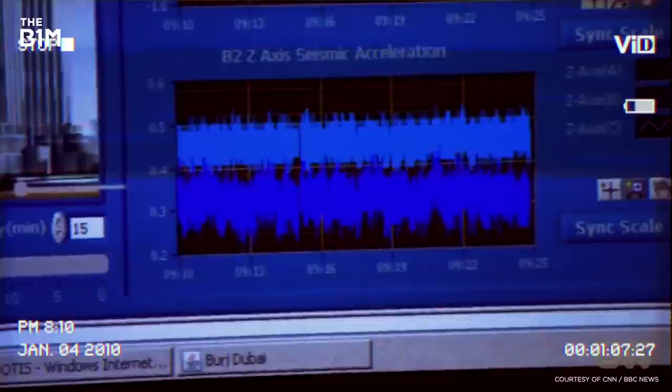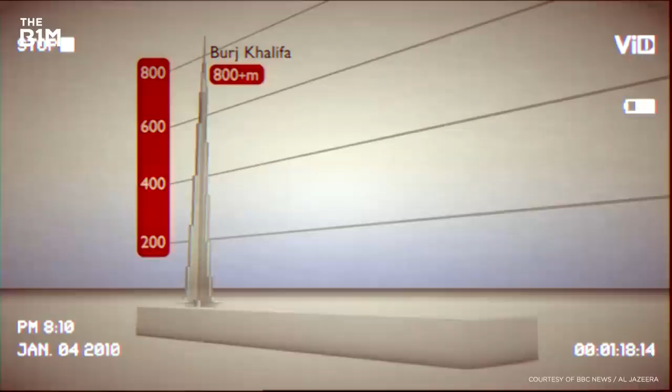This is the Burj Khalifa, the tallest building on Earth, the world's tallest skyscraper. The Burj doesn't just break the world's tallest building record, it completely shatters it. It has 160 floors and is twice as high as the Empire State Building. Taipei 101 could stand beside it with the Eiffel Tower perched on top and still only just match the height of this one.

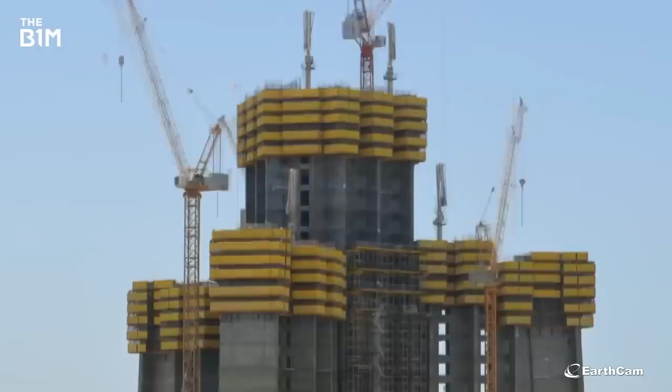Today, the building stands unfinished and abandoned 300 metres in the air. And after years of political crackdowns and a global pandemic, it remains unclear if Jeddah Tower can ever rise to its full height. Even if construction works do start up again, it'll take a massive feat of engineering to complete.

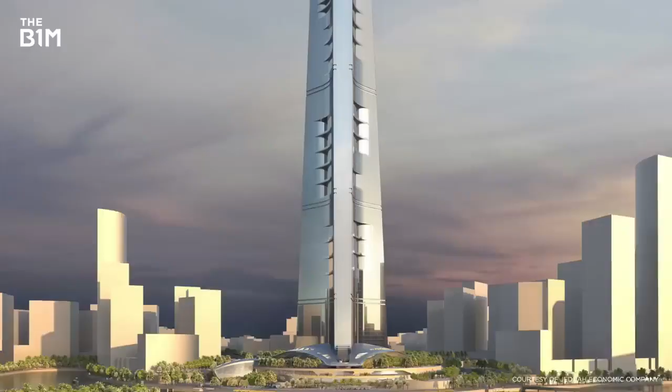There are no building codes that prepare you for it, over a kilometre tall. This building had never been done. With over $1 billion, and to a large extent the country's reputation riding on this tower, all eyes are on Jeddah to see if it can ever complete the world's tallest building.

Now, like any skyscraper, the taller it is, the more attention it tends to get. Jeddah Tower, soon to be the tallest building in the world. Saudi Arabia is making a major push to diversify their economy.

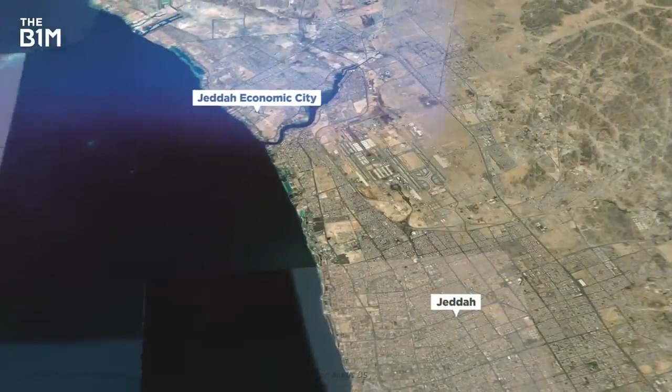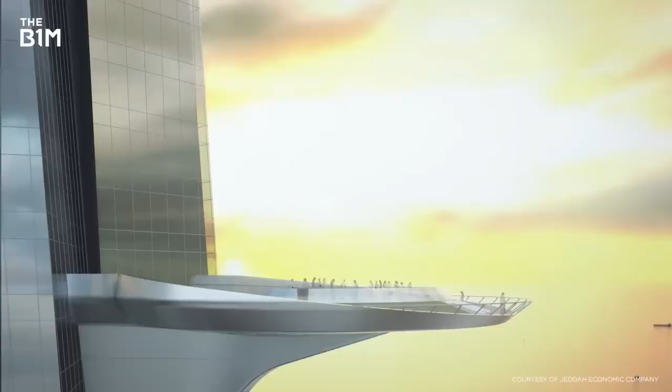Back in 2011, billionaire investor Al-Waleed bin Talal had set his sights on creating a centrepiece for Jeddah Economic City. His bold plan for a skyscraper in, you guessed it, Jeddah, would feature 167 stories of homes, offices and hotels. At a kilometre tall, it would rise well above the 600-metre threshold for classification in the mega-tall skyscraper category, and would essentially try to make Jeddah the Dubai of Saudi Arabia.

It's important to draw a distinction between this and the other huge projects that Saudi Arabia has recently announced, particularly around NEOM. They're led by its public investment fund, which is a state-driven sovereign wealth fund seeking to diversify the Saudi economy away from oil. Jeddah Tower is a private development, albeit one that started out with plenty of backing from many in the state.

Now, to build something a kilometre tall, you need an architect with a strong resume. Enter Adrian Smith. If his name sounds familiar to you, it's because he's the guy who designed the Burj Khalifa.

One of the biggest challenges with creating skyscrapers this high is the extreme lateral wind loads they face. The taller a building is, the greater its tendency to want to sway towards its top, and that's something engineers must address to ensure safety and comfort.

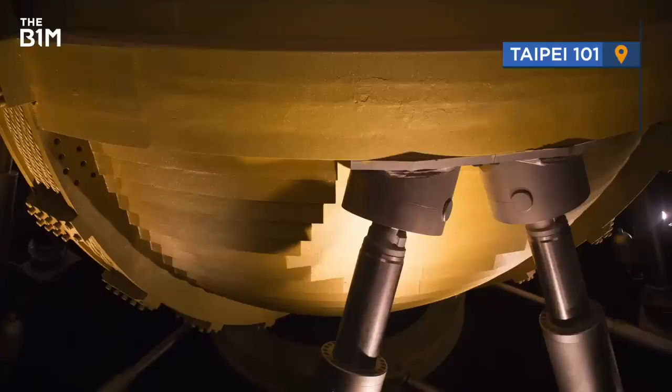To reduce movement, some super talls like Taipei 101 or 432 Park Avenue used massive weighted devices called tuned mass dampers near their summits that counteract swaying motion, but these can take up a lot of valuable floor space.

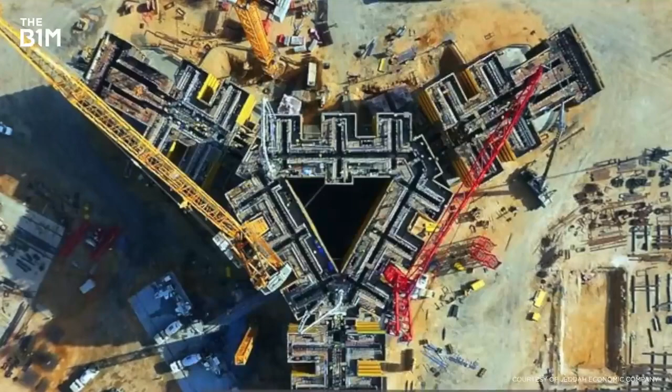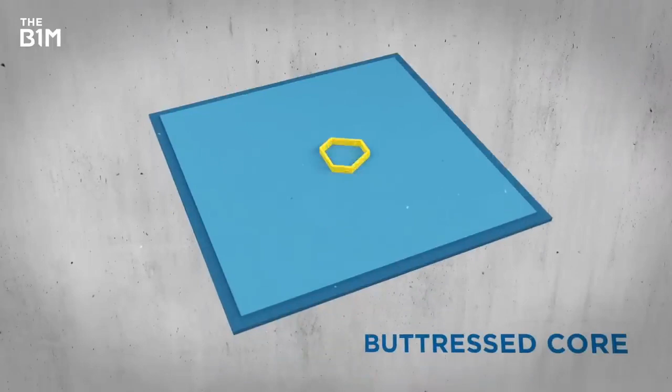For Jeddah Tower, Smith took another route, one that lies in the most fundamental part of the building design itself. Like the Burj Khalifa, the Jeddah Tower plans to use a buttressed core to reach its megatall height. Unlike most skyscrapers that have 4 external walls, this approach sees a hexagonal core reinforced with 3 Y-shaped walls. And that really does work.

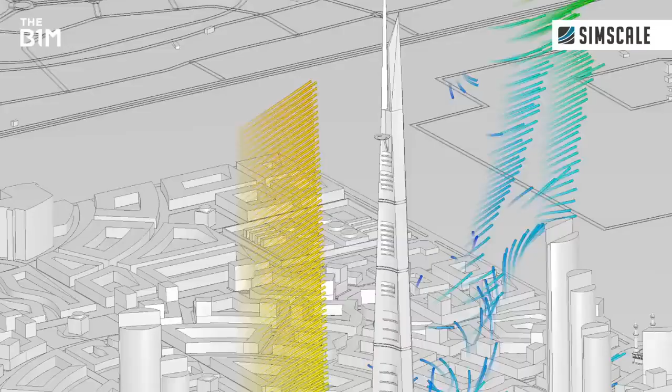The Jeddah Tower would also dramatically taper towards its peak, further reinforcing its resistance to strong winds and making it more aerodynamic than a four-walled straight-up profile. That really matters because winds get stronger the taller you go, and on this site, with a building of this height, there aren't any other buildings or structures around to break up the airflow.

On the 157th floor would be the tower's crowning feature, a jaw-dropping open-air observation deck that would easily become the highest viewing platform in the world.

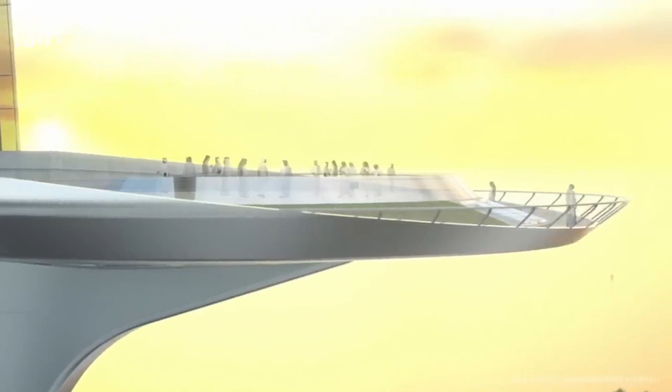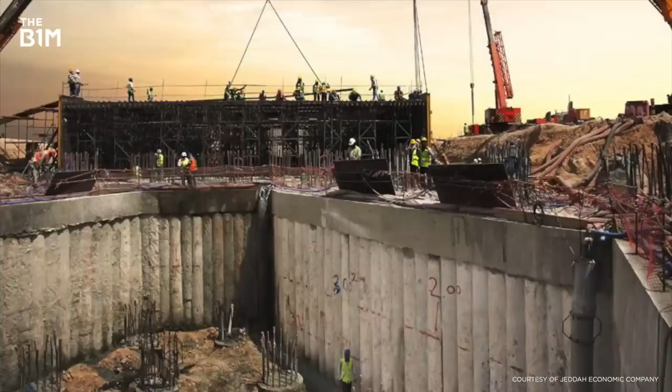With that design finalised, building works first began back in 2013. Now, as we all know, one of the first steps of construction is also the most important: foundations. And to support something this tall, engineers needed to use a lot of concrete.

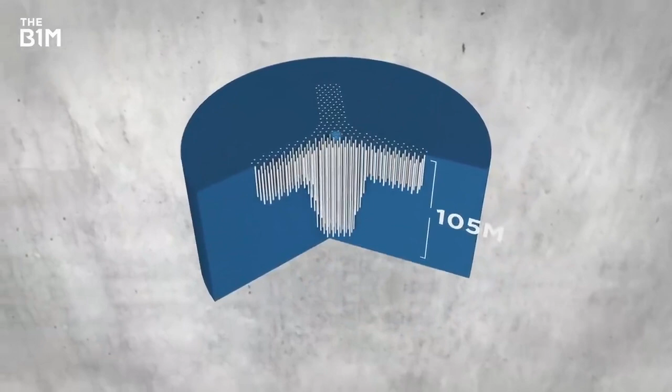First, 270 piles were drilled 105 metres into the ground. Then a giant 5-metre thick concrete slab was placed on top. That would become the base, distributing the weight of all 1,000 metres of skyscraper set to rise above it.

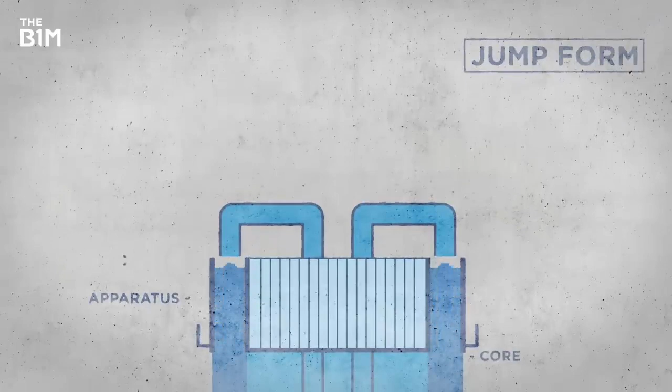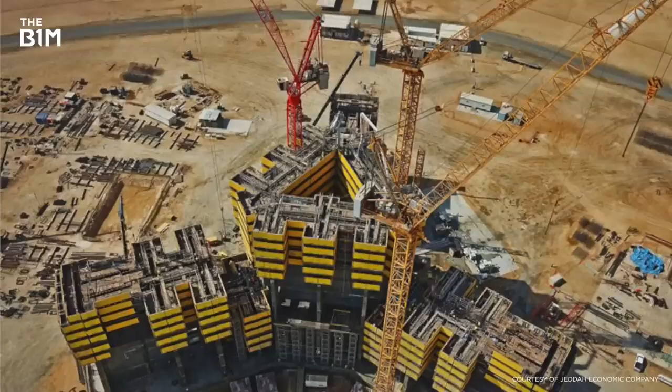Next, the core was constructed, allowing the tower to steadily rise around it. Concrete was poured using a jump form system, a type of climbing formwork that rises with the core structure, allowing builders to work safely and with considerable efficiency inside. Mehdi Jalayerian worked on some of the operational and technical systems within the building.

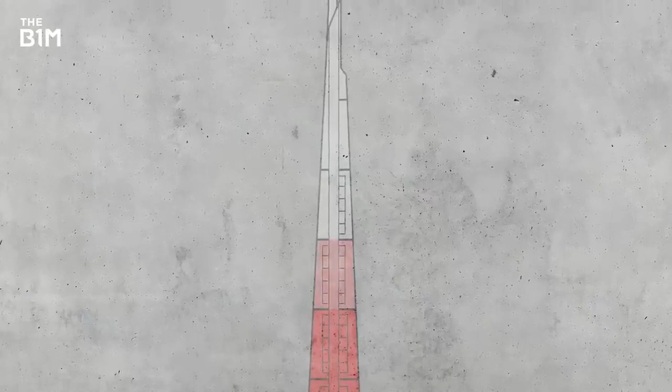As far as the building configuration itself, the challenge we overcame was that we thought about it as being 20 to 40-story buildings stacked on top of one another. So we broke it down into smaller pieces to be able to manage it.

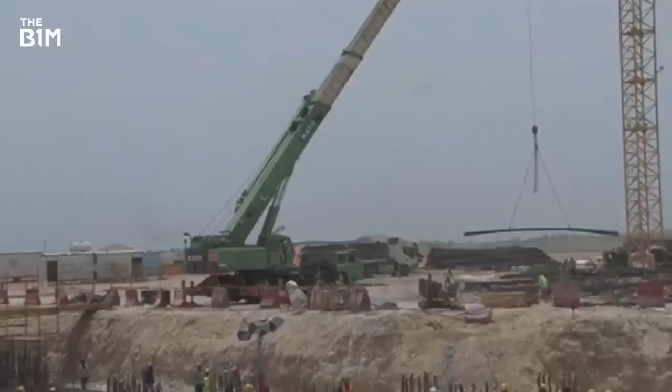In 2015, two years after construction began, the project secured $1.2 billion in funding from a Saudi bank and real estate venture. By 2017, Jeddah Tower had risen 63 stories above the desert, around a third of its final height.

Despite some bumps in the road and minor delays, it looked as if the world would soon be getting its next tallest building. Remarkable times in Saudi Arabia: 11 princes, 4 sitting ministers and dozens of former ministers have been arrested. Among those arrested is the billionaire Al-Walid bin Talal, one of Saudi Arabia's most known business tycoons.

Things took a turn when Mohammed bin Salman became Crown Prince of Saudi Arabia and began an anti-corruption purge. Two people caught up in the events included Jeddah Tower's key backers: businessman Prince Al-Walid, and Bakr bin Laden, chairman of the tower's construction company, Bin Laden Group.

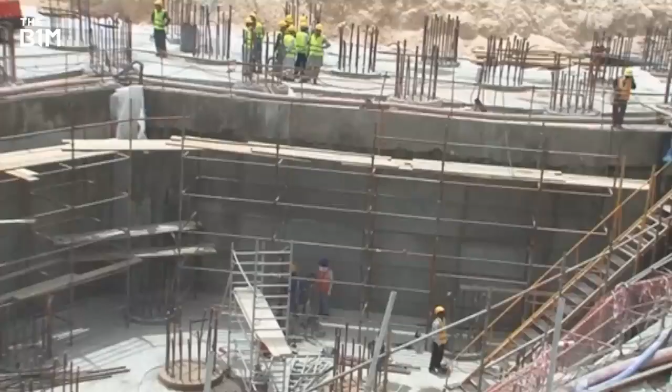That all caused work on Jeddah Tower to briefly stall. The project's backers were eventually released and work briefly restarted, but then there were labour issues with the contractor that further complicated matters, stalling it again.

Just as construction was about to restart in 2020, the pandemic hit and works halted. It appears that ever since then, the tower has sat empty and incomplete. Yet take a look at the official website, and the homepage still says it's happening.

Jeddah Tower was going to be a challenge for engineers on a good day. Throw in these considerable political and logistical issues, and it's perhaps little wonder that things have seemingly ground to a halt. So we've seen what it's supposed to look like, but even if everything restarted, is it actually possible to build this tall?

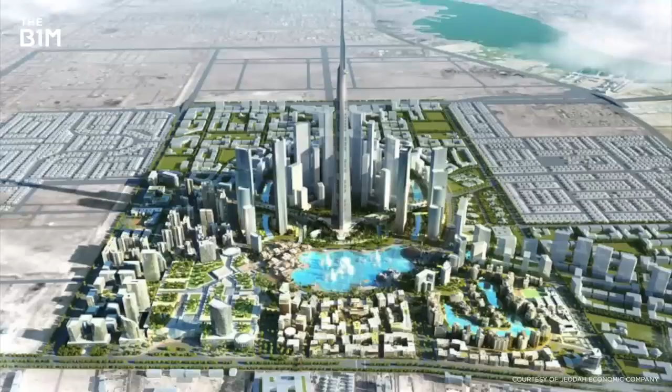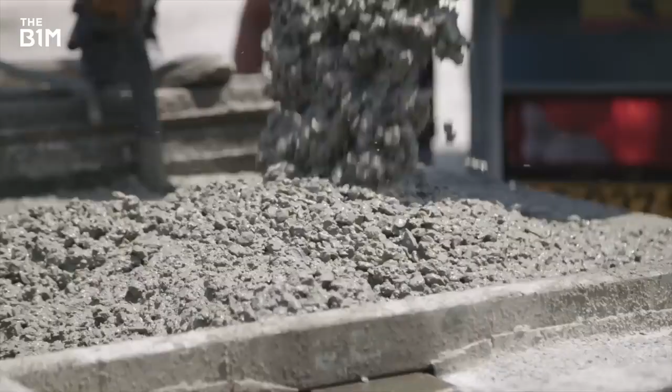Well, the truth is, we'll never know unless it's actually achieved in physical steel and concrete. What we can say is that engineers were pretty certain they could do it, and built the core to almost the same height as New York's Chrysler Building before things got stopped.

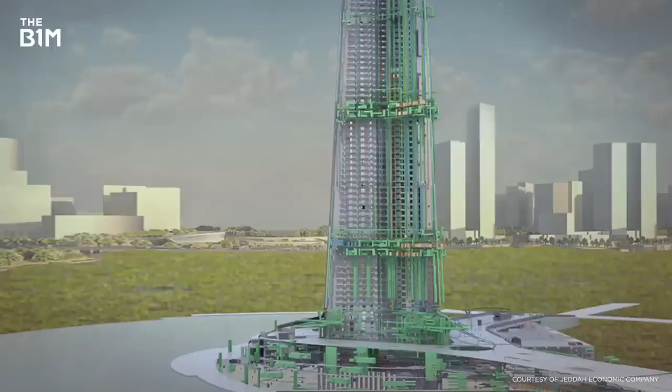They worked from the established principles paved out by other tall buildings, most notably the Burj Khalifa. They modelled, tested and simulated their designs in a wind tunnel and brought them to life in virtual software before even putting a spade in the ground or attempting to pour concrete above the clouds.

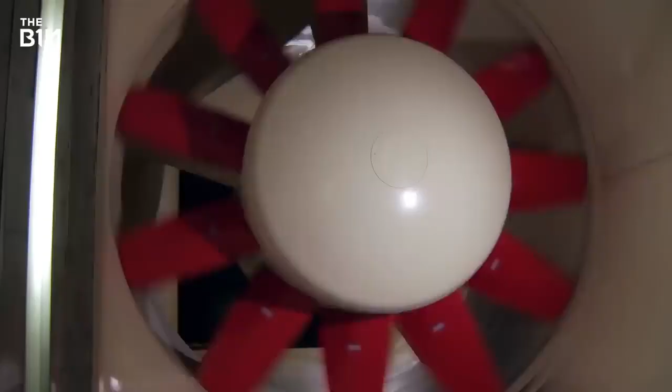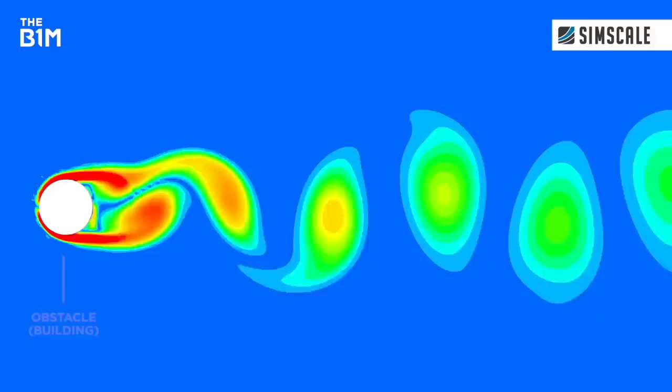It allows engineers to test how different profiles and designs will perform under a range of conditions. All tall buildings have to manage wind loads, and as we said, it gets harder the higher you go. When strong winds move around structures, areas of lower speed air, also known as separation vortices, emerge on their opposite side, creating suction forces that pull at the buildings, putting them at risk of swaying back and forth.

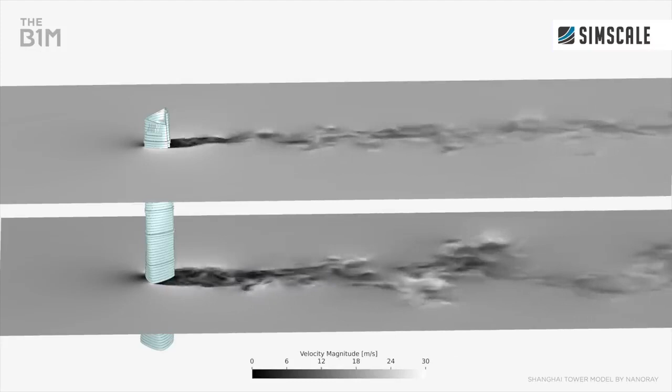Tapering a building as it rises helps to break up the uniformity that causes this. We ran a model of Shanghai Tower through SimScale software to show you just how effectively this works. We also created a simulation showing how wind forces could influence the surrounding area at street level, both with and without the skyscraper.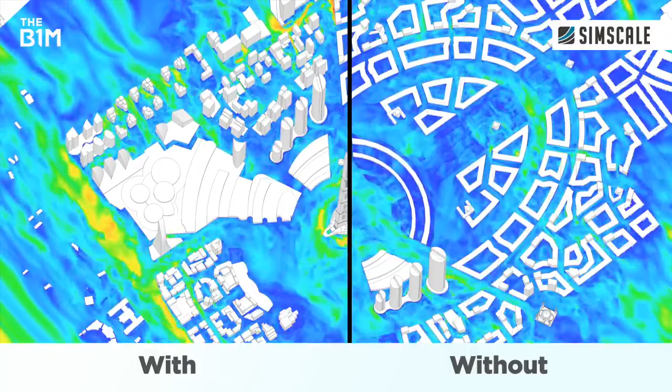The completed tower would be likely to produce stronger gusts on the ground near the base, so designers will need to work to minimise that and protect pedestrians.

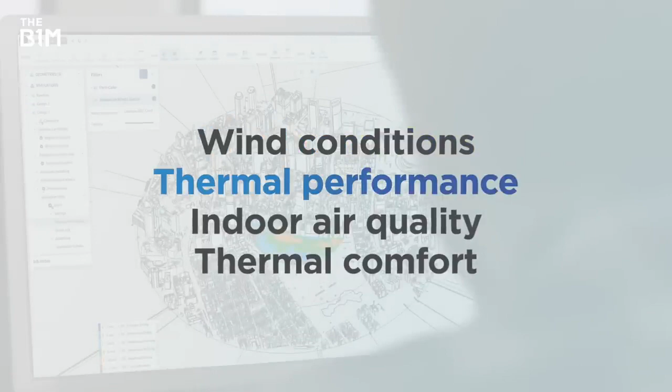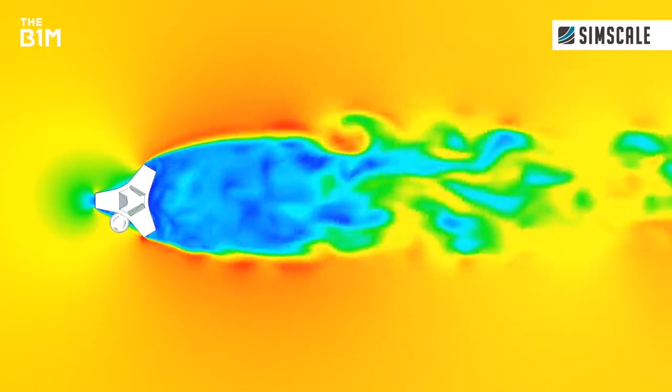To take this concrete core in the desert and turn it into the full-height occupied building will mean running tests to understand the strength and rigidity of the existing structure before recommencing construction on top of it. The building's structural lifespan calculations are thrown off by part of it being 6 years older than the rest.

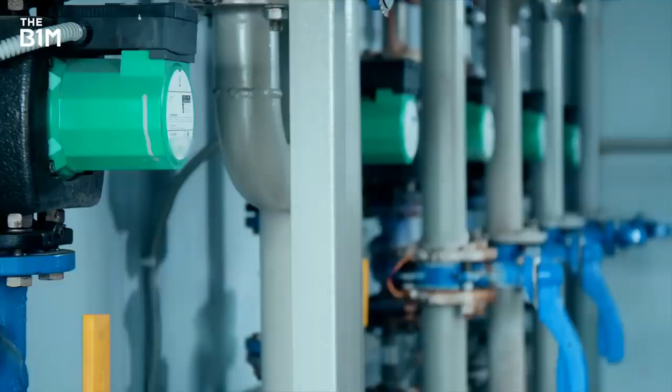Once the remainder of the structure goes up, an advanced cladding system needs to follow close behind. Mechanical systems that can withstand extreme conditions 1,000 metres in the sky then need to be designed and installed. And it'll need one of the tallest elevators ever built.

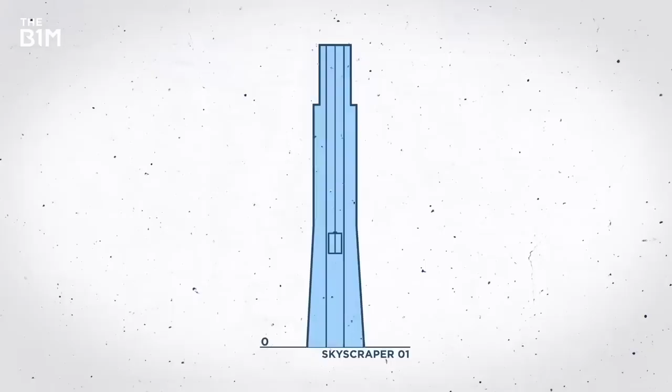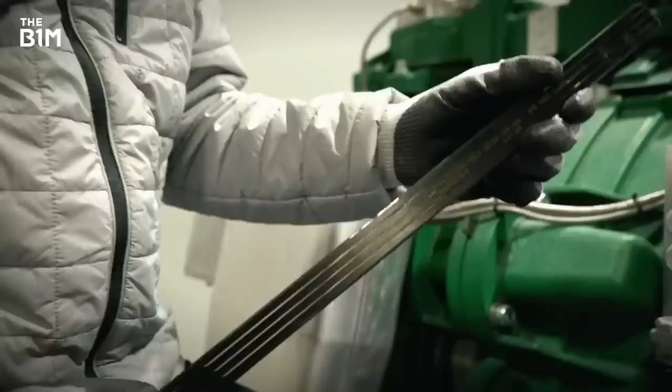Historically, skyscrapers this tall have required people to change elevators on the way up. That's because after a certain point, around 500 metres, the weight of the steel ropes used to lift them becomes too much. But innovations like Ultra Rope by Kone, which we mentioned in a recent video, replace those steel ropes with a carbon fibre material that's 7 times lighter and more durable. It means an elevator can travel up to 1 kilometre into the sky, and the B1M understands that Kone's system is specified to be installed at the Jeddah Tower should the building proceed.

As you might be gathering, the whole extreme height thing really does make this project tricky. Despite that, some designers are turning it to their benefit.

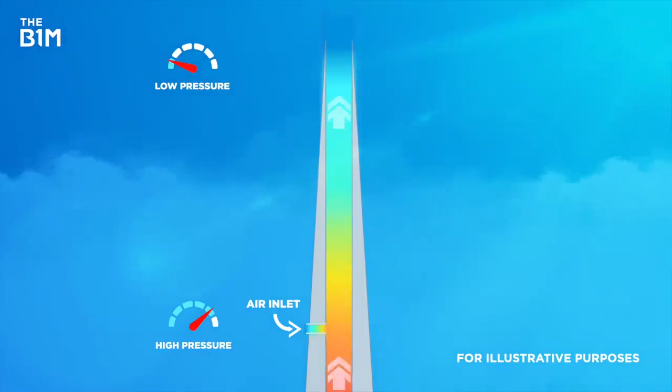At those upper elevations, you have actually higher intensity of solar. For example, the top of the building has a spire, which is the architectural silo. We had to build an environment where we could control the temperature, so the concrete is not expanding and contracting and in turn would crack. We utilize the temperature variation to create a stack effect inside the silo to be able to ventilate it properly. So it doesn't really use any energy. It's self-ventilated, but it's very controlled.

But the Jeddah Tower's location in the desert brings more than just intense heat to the table and creates a huge maintenance requirement. The sandstorms are abrasive, so you can imagine that very fine sand swirling around the building, and you want to have very durable coatings on the building that will not literally be sanded away. That also then affects the cleanliness of the building. In the Middle East, they use many systems that don't require a human being to be on the scaffolding, and it's automatic.

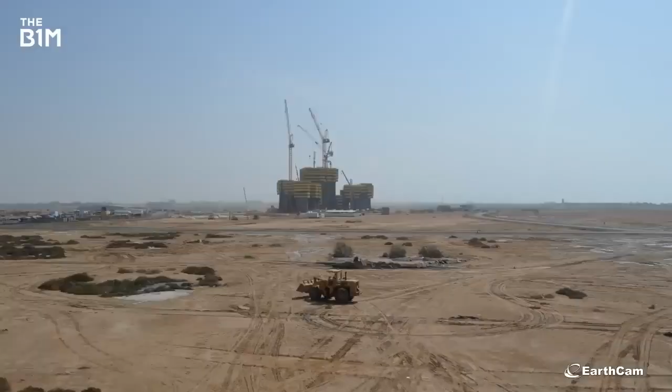Now, building something as bold as the world's tallest building will bring you headlines and some jealousy.

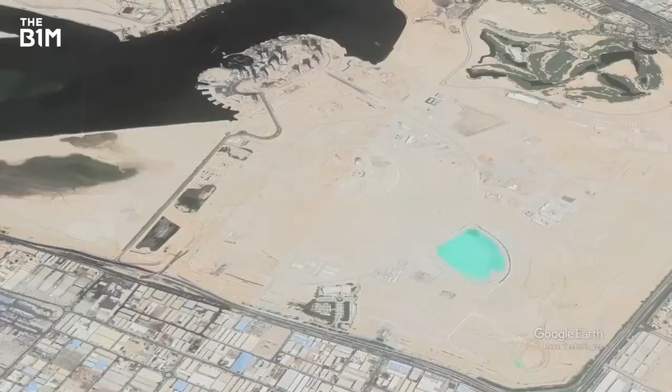You might recall plans for Dubai Creek Tower, a scheme announced by the UAE to bring the title of world's tallest structure back to the country, that started work and then paused again after Jeddah Tower hit the buffers. Its foundations remain sitting there, kind of like a quiet warning to Jeddah should it ever start up again.

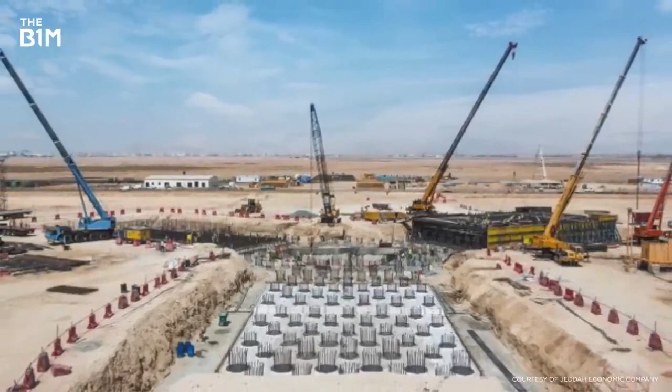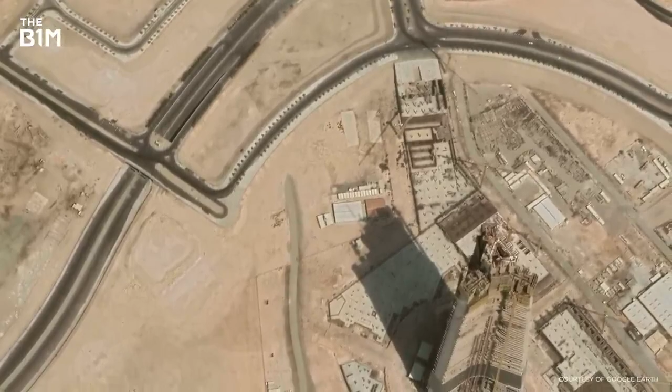Despite the long pause, Mehdi thinks things could start to move soon. There is a lot of talk right now and planning to restart. They have built the utilities and roadways at the site. Obviously, it's been stopped for a while, and there are things that need to be rethought for the process. So now I think we're in a much better position.

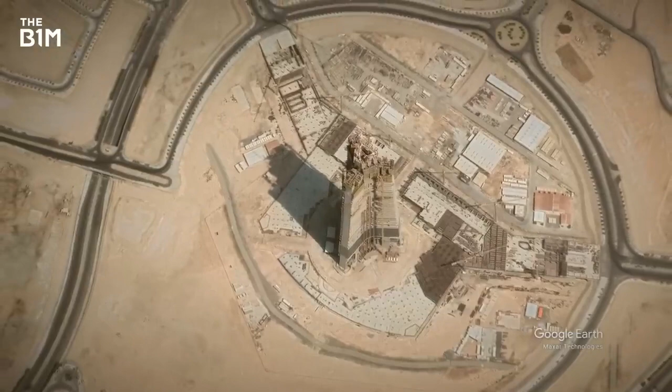While it may still be possible to turn this super tall stump into the world's tallest building, right now the challenges of funding, politics and extreme engineering all appear equally daunting, collectively putting a heavy block on progress. If the world's first kilometre-high skyscraper ever rises from these sands, it'll be both record-breaking and remarkable in many ways.